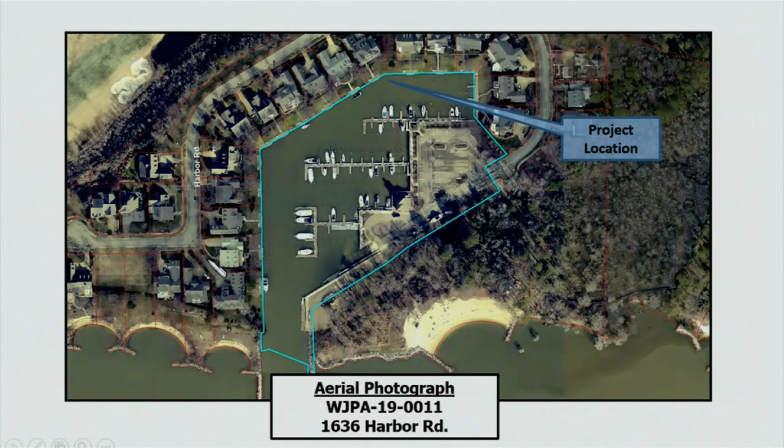This is the existing marina as it currently stands, with topography surrounding the marina. The floodplain here encompasses the entirety of the project and the proposed location.

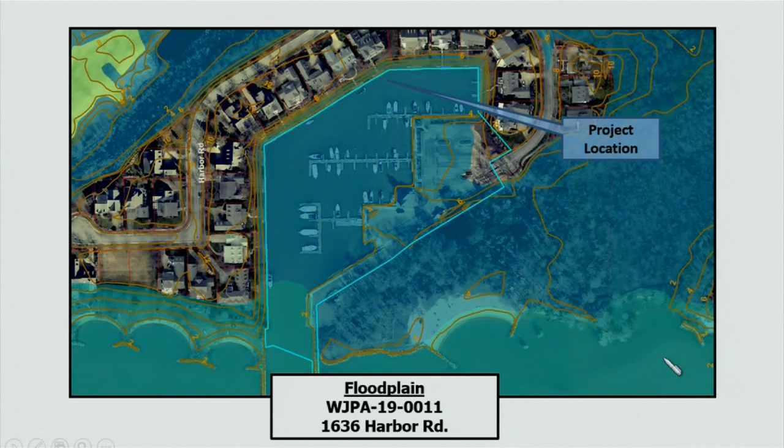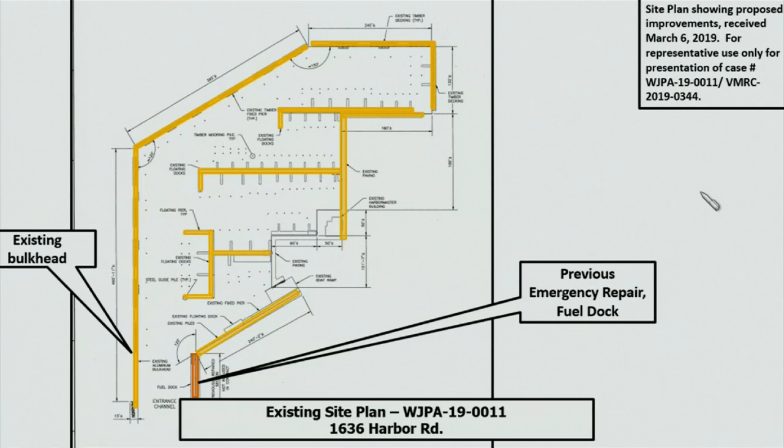The yellow lining shows the proposed bulkhead repair in the exact same location as the original bulkhead. I believe there is noted that there may be a little bit of riprap here in the red lining, which will be removed as necessary.

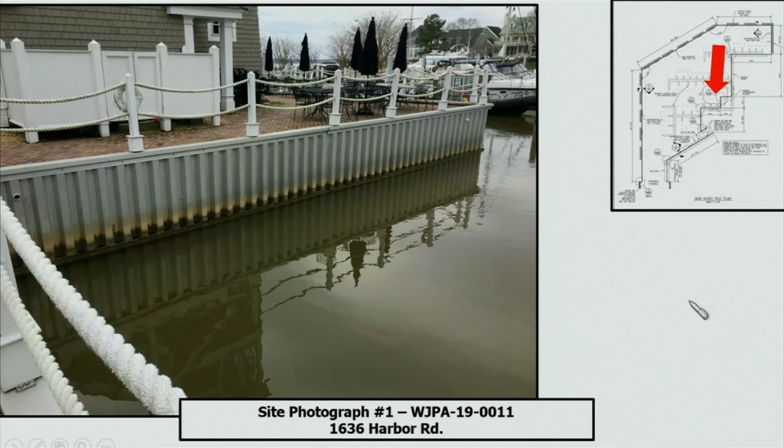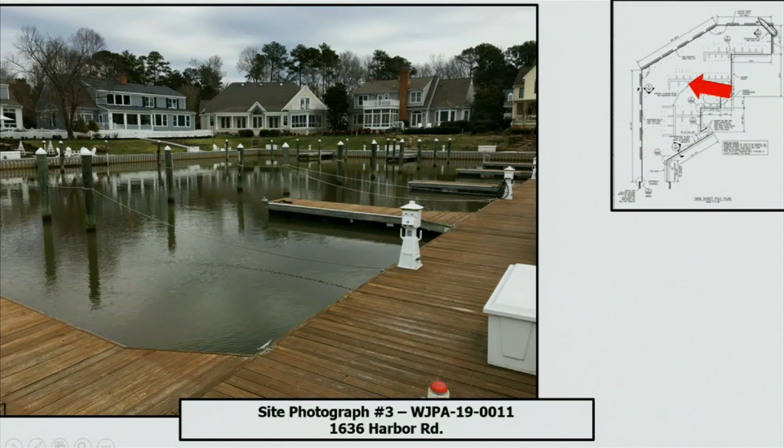Site photos from the project site. Here's the vinyl bulkhead which they plan to remove and replace, facing out towards the adjacent side of the marina with houses on the outside of the bulkhead.

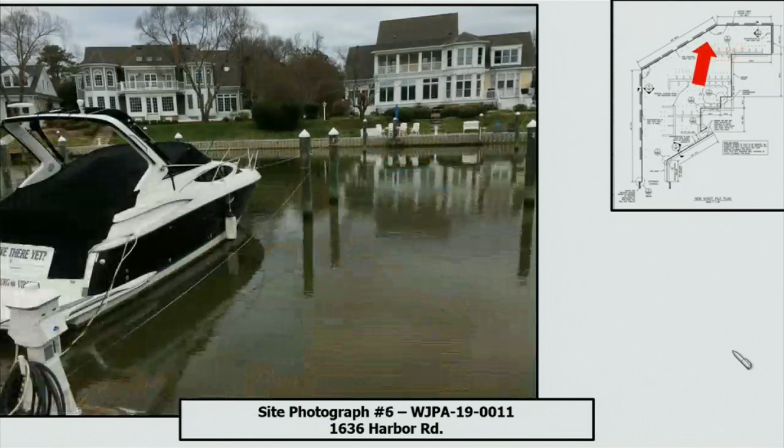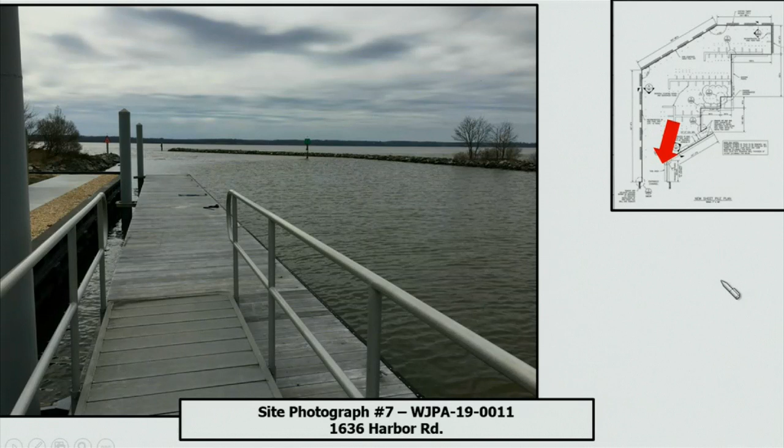Here is the previously repaired emergency fix from years past. Again, staff does recommend approval for this project and proposal, given the conditions that all other necessary federal, state, and local permits are acquired as they are required.

All development activities located in the special flood hazard area shall comply with Article 6, Division 3 of the floodplain area regulations. A wetlands permit for this project shall expire on April 10th, 2020 if construction has not begun, with extensions requested no later than 6 weeks prior to the expiration date, dated February 27th, 2020.

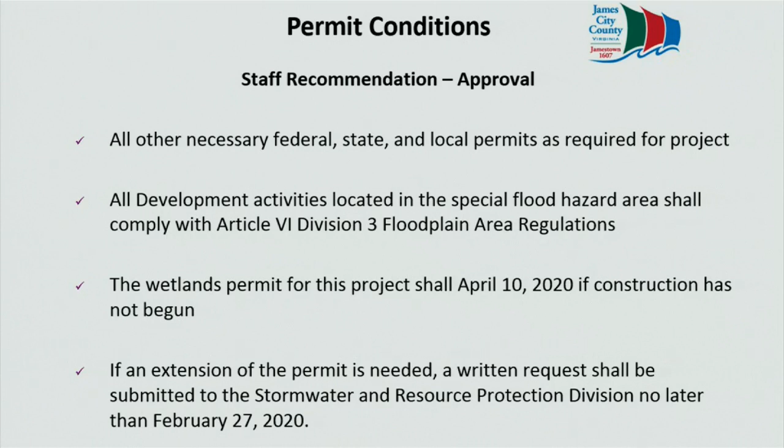Thank you very much. I'd be happy to answer any questions at this time.

Any questions for staff? Trevor, just for clarification, the application speaks to some areas replacing in place, I believe, but also at a maximum distance of 2 feet in front of the existing bulkhead. Is it in place, or is it a combination of those two options? I believe it is in place, but I'll allow the applicant to correct if that's wrong.

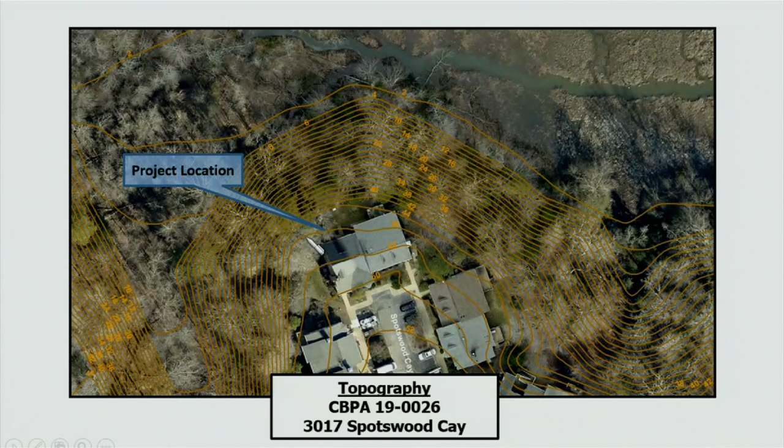Looking at the topography of the site, you can see this was laid out with the road going down the ridge line of the property on this peninsula, with the units surrounding it. If we superimpose the RPA on there, you can see the RPA does impact, or these units impact the RPA.

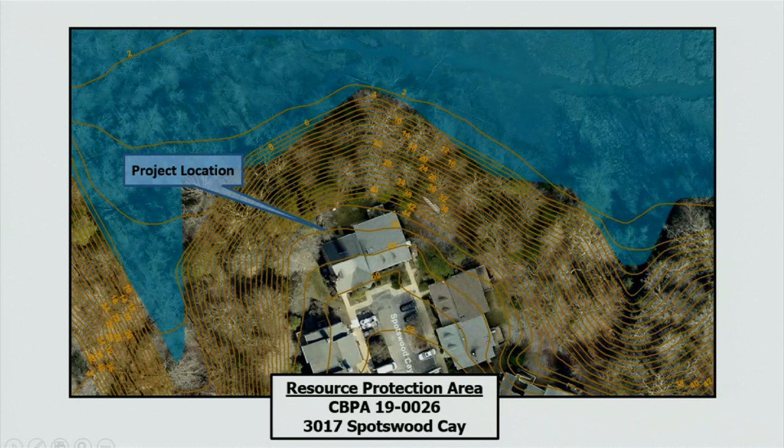The floodplain as it affects this property down at the toe of the slope has no effect on this application. From the application, this outline is the unit in question, with this outline being the proposed deck extension.

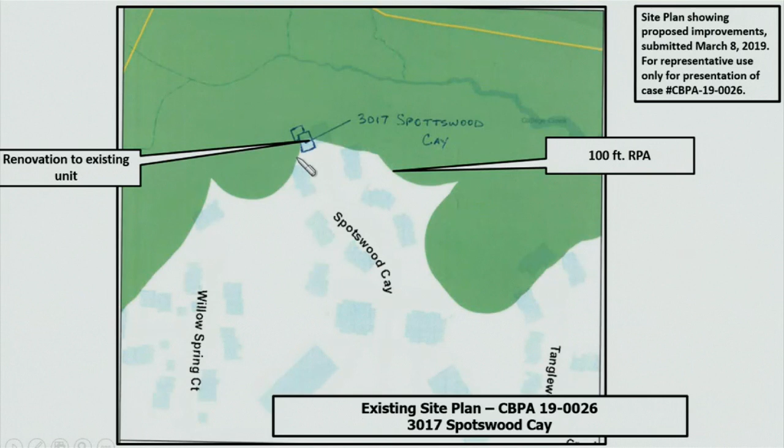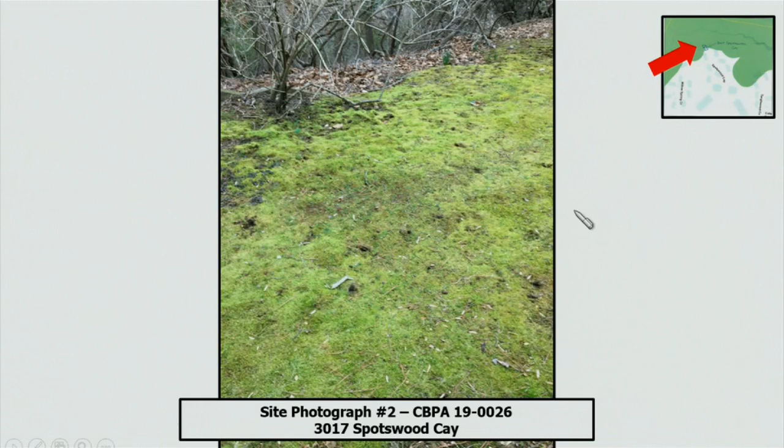Green is the 100-foot RPA, the renovation to the existing unit, and then the proposed deck. A couple site photographs. Looking at the back, this deck will be removed and this area filled in with a new sunroom. No additional impervious cover with that renovation. The area that would be impacted is mossy, with no grass to be maintained or whatnot.

So again, staff does recommend approval. We believe these impacts to be minor, and should the board choose to approve, we recommend these conditions: that any other necessary local, federal, and state permits be required, and that a mitigation plan and a surety of $250 be required. That document does say $500, but it would be $250.

The exception request be null and void should construction not begin within 1 year from tonight's date, April 10th, 2020, and any written request for extension be submitted to our office no later than 6 weeks prior to that expiration date, which is February 27, 2020. Happy to answer any questions the board may have regarding this application.

Okay, no questions. At this time, I'd like to open the public hearing. If the applicant is present, would you like to come forward and address the board?

This is the first time I've done this, so I'm not sure if I really needed to go, but I just want to come here representing Williamsburg Landing. My Director of Construction, Randy Rattan, is here with me. It's just a simple matter of trying to improve our property.

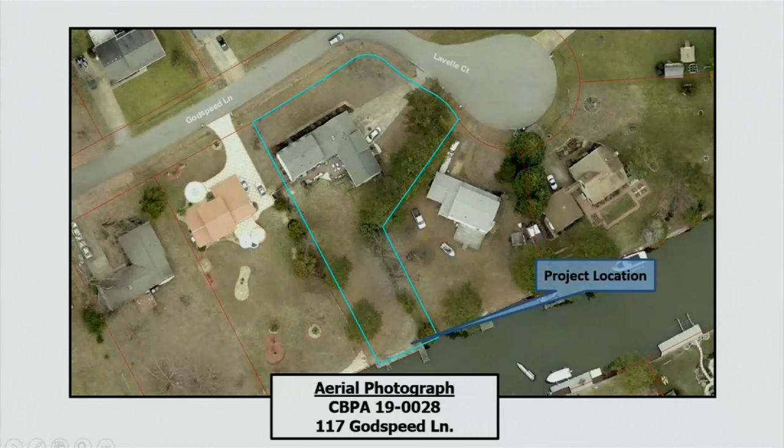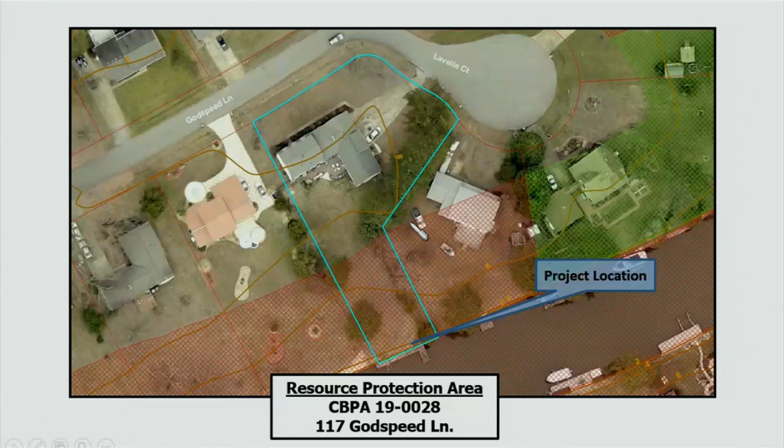The topography is fairly flat, however it does steepen towards the water as you get closer seaward. The resource protection area, as it affects this parcel, comes off fairly heavily and takes up most of the backyard of this property. The floodplain as it affects this property as well, affecting the majority of it, along with the rest of the houses on the street.

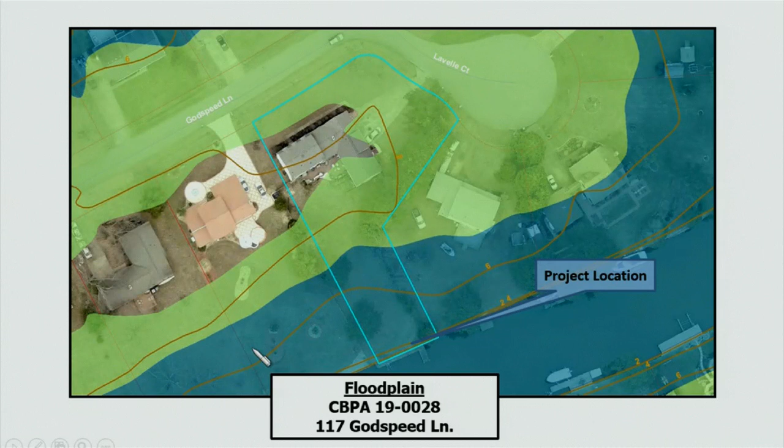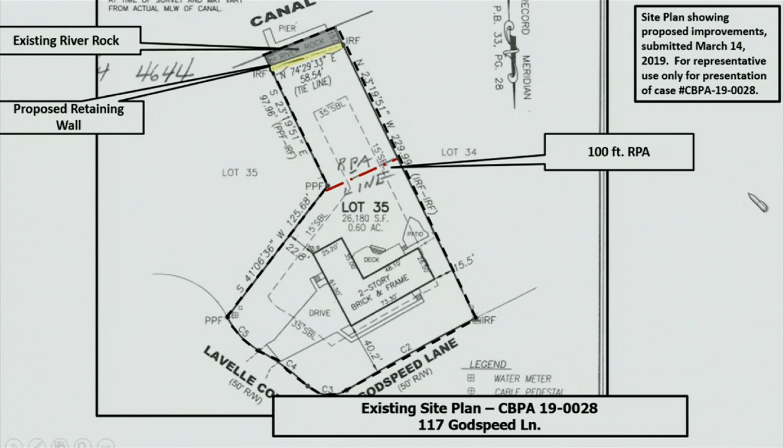A site plan shows the RPA line impacting, or as associated with, the lot here, and the proposed retaining wall to be implemented here, along with the existing river rock.

This is a more close-up version of the proposed retaining wall, with the shrubs proposed for mitigation landward of the retaining wall, and pervious pavers to take the place of the crushed stone currently existing on site. Because crushed stone is considered impervious, it is not coupled in with the impacts to the RPA.

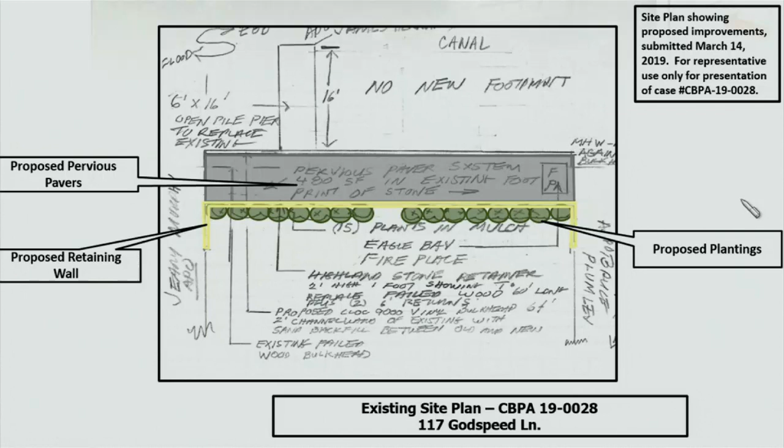Again, staff does recommend approval of this project and exception request, given that all other necessary local, state, and federal permits are obtained. All development activities located within the special flood hazard area shall comply with Article 6, Division 3 of the floodplain area regulations, and a surety of $250 shall be required to ensure mitigation plantings.

This exception request shall become null and void if construction has not begun by April 10th, 2020, with written requests for an extension submitted no later than February 27th, 2020. Happy to answer any questions the board may have at this time. Thank you for your time.

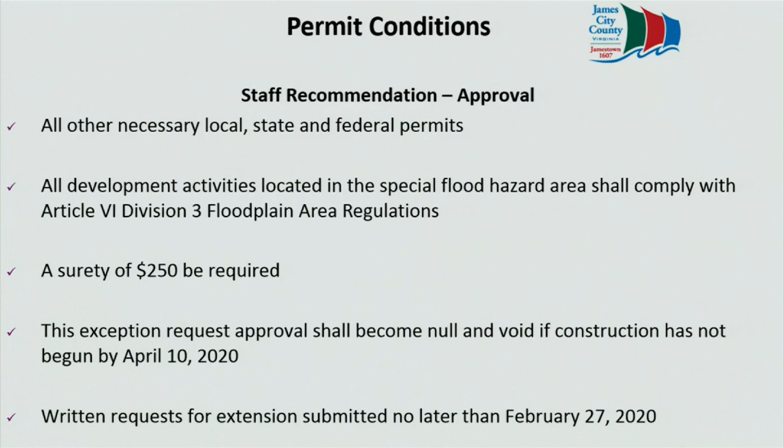Questions for staff? Where were the timbers? We're considering the black curved line to be the timbers that are holding in place and separating the yard from the river rock. That's the defining area that will then be replaced by the retaining wall.

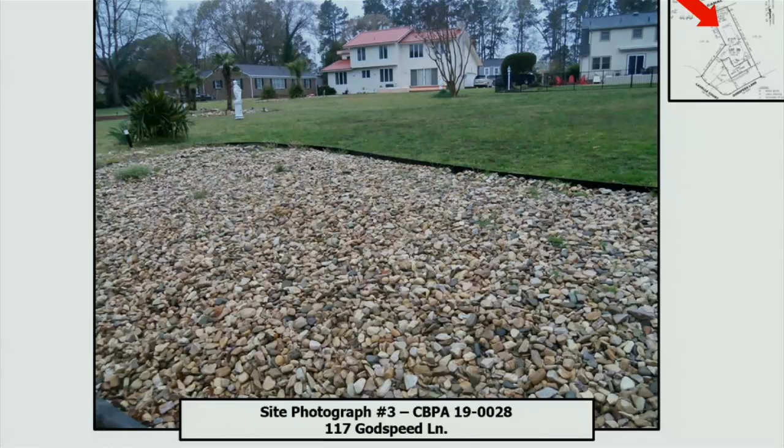It says they're going to fill the otherwise sloping yard to prevent further erosion. So they're going to put in a retaining wall and then fill from the house forward to that wall? Yes. Basically, and the contractor can speak more to it, but they'll fill from the height of the retaining wall back towards the house and meet the ground where that elevation meets.

And what was the height of the wall? I will defer that question to the applicant.

Okay, at this time, I'd like to open the public hearing. Would the applicant like to come forward and address the board?

Thank you. Mo Blocks from Southern Landscaping and Construction Incorporated. I can probably answer some of the questions before you ask them, if you'd like me to do it that way. Go ahead.

The area with all the river rock in it is way larger than what's going to be left when we do it. The retaining wall we're going to put in, which is replacing the wooden one, will only be 10 feet from the bulkhead up. The reason for wanting to put it in is we're going to hold back the elevation. It's only going to be probably 2 foot showing, a foot in the ground, the wall, all right?

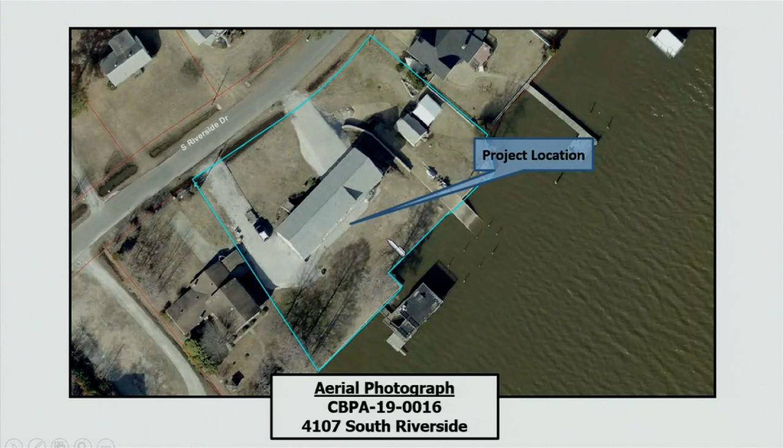Close up version of the aerial photograph. There's an existing drive. This aerial photograph is a little old; this structure no longer exists. This gravel concrete drive goes down to a boat ramp to the water. Existing shed here. This area in the back is a depressional area.

I've turned on the contours for you. The house was elevated out of the floodplain. And then in the course of doing all that work, this area proved prone to holding water, and a sump pump has been installed that's on a float valve and discharges into the Chickahominy River. There are existing bald cypress here along the bulkhead and over here along this other bulkhead. Those are being proposed to remain.

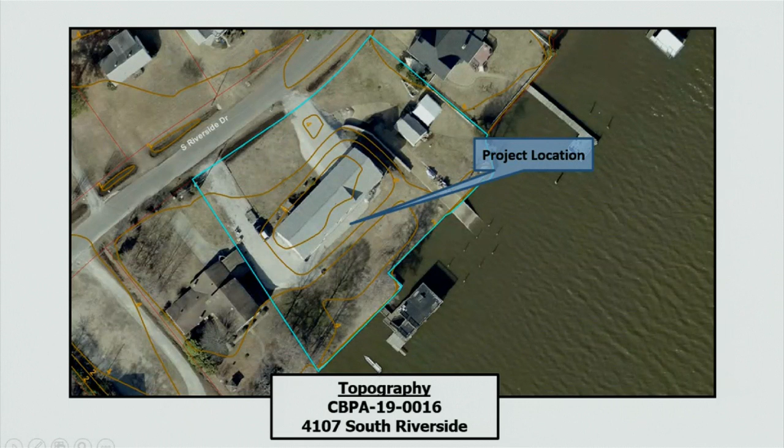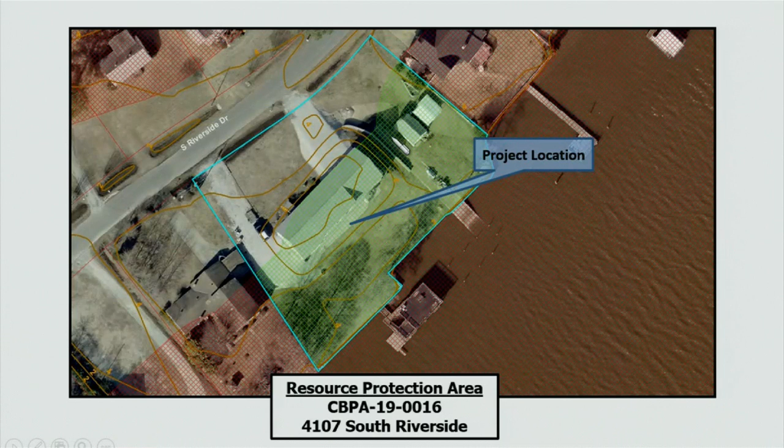The RPA, as it affects the property, goes basically to the face of the house and does encompass all of this garage and boat ramp access over here to the north. And then the floodplain as it affects the property, from the site plan application...

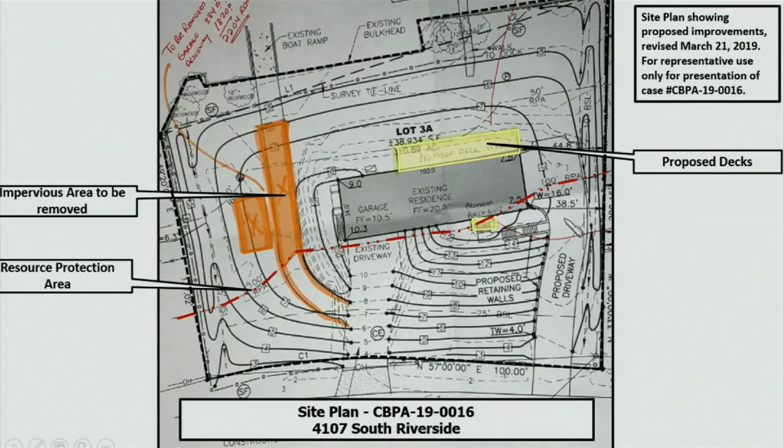There's the resource protection area as it affects the property. Proposed deck, impervious cover to be removed. The site photographs from the property.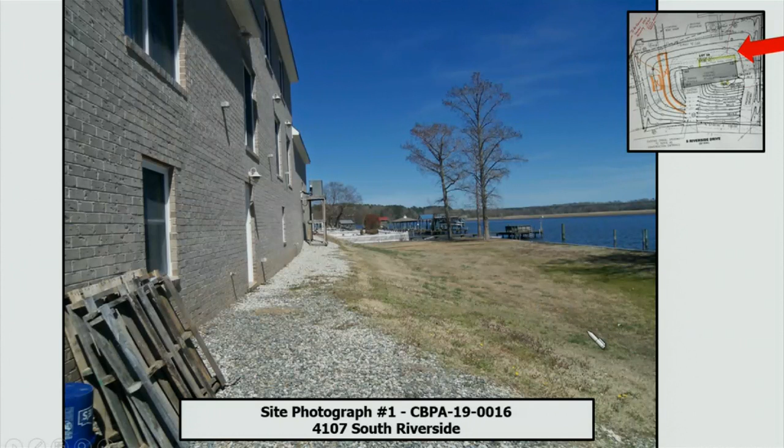They're going to be holding this elevation here and then filling in this area here. This area here does hold water. The deck would be up at this elevation,

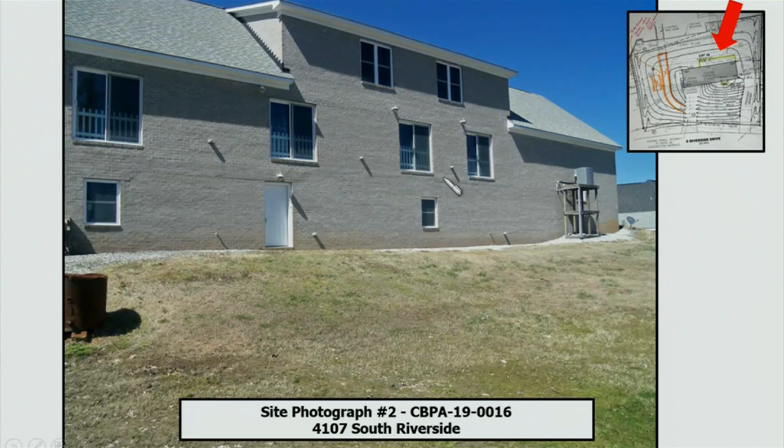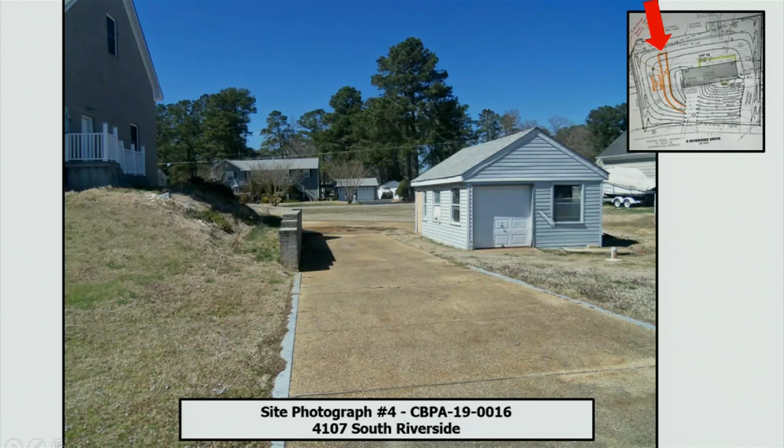encompassing those 3 or 4 doors that exist. This concrete would be removed, the retaining wall would be removed, this garage would be removed.

The existing sump that I was telling you about is approximately this area here, and like I said, it's on a float valve, so when it gathers enough water, it turns on and discharges that water into the river.

These trees are all bald cypress and they would all remain. The edge of the fill is approximately here, going in a manner, something like that in the rear yard.

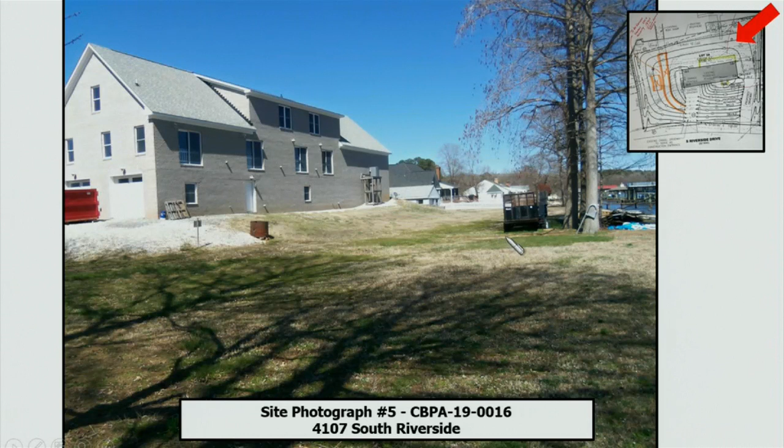Front yard, this entry stoop gets reworked, comes out to about here and then does a 90-degree turn into and down towards the existing driveway here. And then this front yard gets filled in as well.

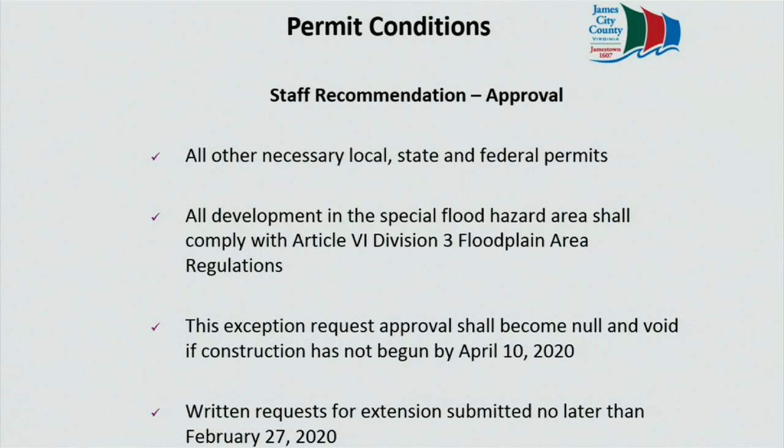Staff does recommend approval of this application with the following conditions should the board choose to approve: that any other necessary local, federal, and state permits are required, that development in the special flood hazard area shall comply with Article 6, Division 3 of the James City County Floodplain Area Regulations, that the exception request become null and void if construction has not begun by April 10, 2020, and that any written request be submitted to our office no later than 6 weeks prior to that expiration date, which is February 27th, 2020.

Be happy to answer any questions the board may have on this application. Any questions for staff?

Mr. Wilson: Quite a lot of fill on the lot. I understand that because of the removal of existing impervious cover, you're not requesting any additional planting. Has the applicant proposed any additional stormwater treatment other than diversion into ditches? I mean, is there any infiltration opportunity beyond the ditch flow?

Mr. Roadley: The short answer to that is the applicant has not proposed any because staff has not requested any. Chickahominy Haven area typically has poorly drained soils, as you know. I don't know if there would be much opportunity to infiltrate a great deal of stormwater, especially in the rear of the yard, going towards the river.

The front of the yard, Mr. Sheets will have to put in a new septic system because that's where the septic currently lies. He is aware of that, and so I don't think there's any opportunity to do stormwater infiltration in the front of the yard.

I don't know, we haven't spoken to him about any additional planting mitigation because the application itself was a net reduction in impervious cover. To follow up the previous application, this is significantly more fill. Has an engineer reviewed the flow calculations to make sure that the conveyances are suitable so that it doesn't spill over on the neighbor's property?

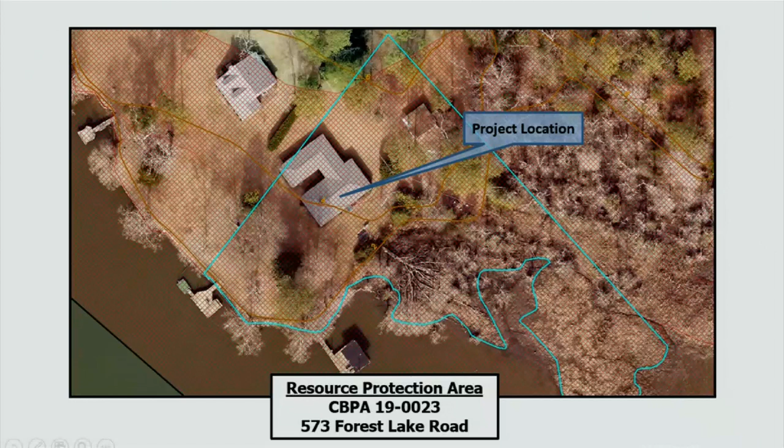The resource protection area does encompass 99% of the property, with just the furthest tip outside of the RPA. Again, floodplain here is an issue, which I believe is part of the thought with the reconstruction of the house. I believe it is also being raised to accommodate for flooding purposes.

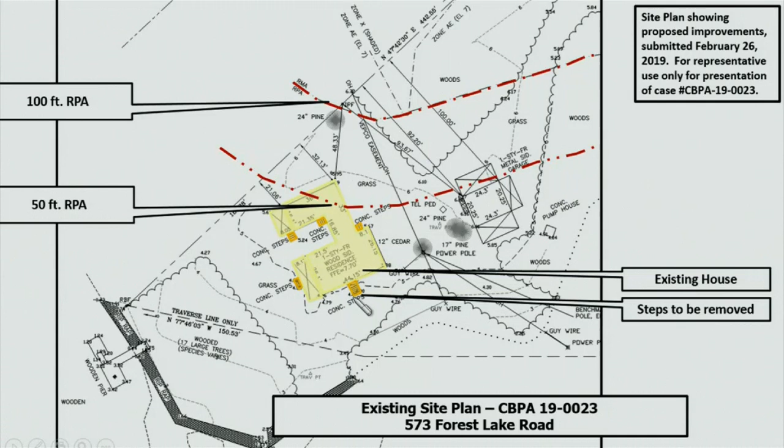Site plan, the existing site plan as can be found on the parcel with the house located here, the 50-foot RPA impacting the house as shown above, and the 100 on the parcel. This is the existing house, and in orange I've highlighted the steps that the applicant has proposed to remove associated with the renovations to the house.

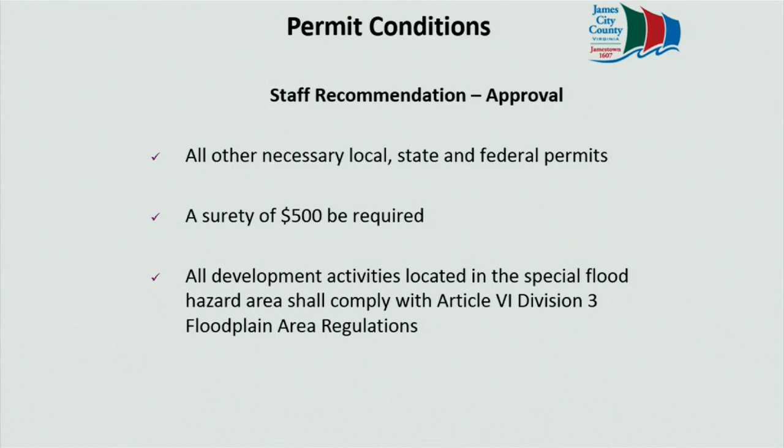Again, staff does recommend approval of this exception request, given that all other necessary local, state, and federal permits are required; that a surety of $500 be made acceptable to the James City County Attorney's Office to ensure mitigation; that all development activities located within the special flood hazard area comply with Article 6, Division 3 of the floodplain area regulations; and that this exception request become null and void if construction is not begun by April 10th, 2020, with written requests for an extension submitted no later than February 27th, 2020 to the Stormwater and Resource Protection Division.

Thank you. I'd be happy to answer any questions the board may have at this time.

I didn't quite follow. What was the body of water directly in front of the house? Yes, this is the Diascund Creek. Okay.

I realize this is not under the applicant's control, but was the existence of the VEPCO easement, did it have any noticeable impact on vegetation? I know sometimes they come through and clear everything within many feet of their access. Was that noticeable at all? I'm not aware. I'll defer any other notices to the applicant, though.

So they're going to reduce the perimeter of the house? That is my understanding, minus the fill of the nook that is pictured above. So the nook is going to be filled in, but they're going to pull back the rest of the house? Correct, equating to a total of a 32 square foot reduction in impervious cover.

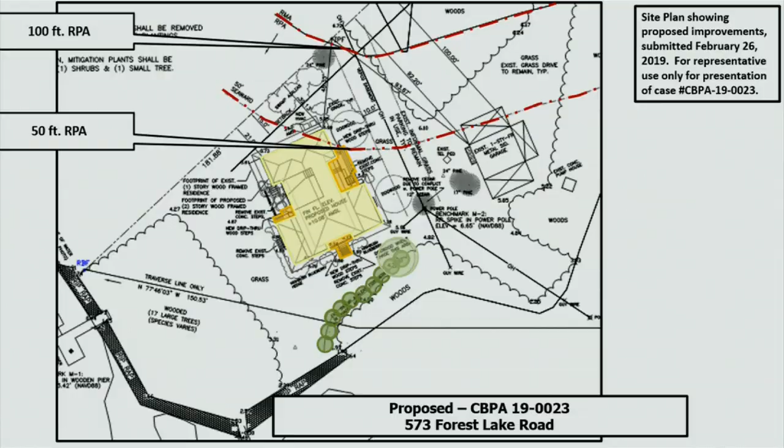May I, Mr. Chair, chime in? Mr. Long and myself met with Mike Matthews, the owner of the Structures Group, on site. He indicated at that time that the interior of the U, from the existing, would be filled in as house, like Mr. Roadley suggested. When we got this drawing showing the new house, we noticed that it says here that the existing drip line of the roof was in this area, and this was the proposed area that Mr. Long highlighted in yellow. So between the addition of the house structure in the interior minus the roof line of the exterior, it equated to a negative 32-foot reduction. I understand the confusion, it took us several half hours to hours to look at it to figure out exactly what was going on.

I believe somebody had asked a question earlier about whether the structure itself was being raised, and the answer is yes. The finished floor will be 2 feet above floodplain elevation, which puts it at approximately elevation 9, which is one of the reasons to do the project from the owner's perspective. So it's similar to the last case in that the house will be demolished, rebuilt on the same footprint, and then elevated up out of the floodplain. Okay on the footprint?

Okay, any other questions for the applicant? Thank you. Anyone else like to speak on this issue? At this time, I'll close the public hearing.

Looks pretty close. They're basically just raising it. I have no comment, I appreciate their attempt to reduce the footprint.